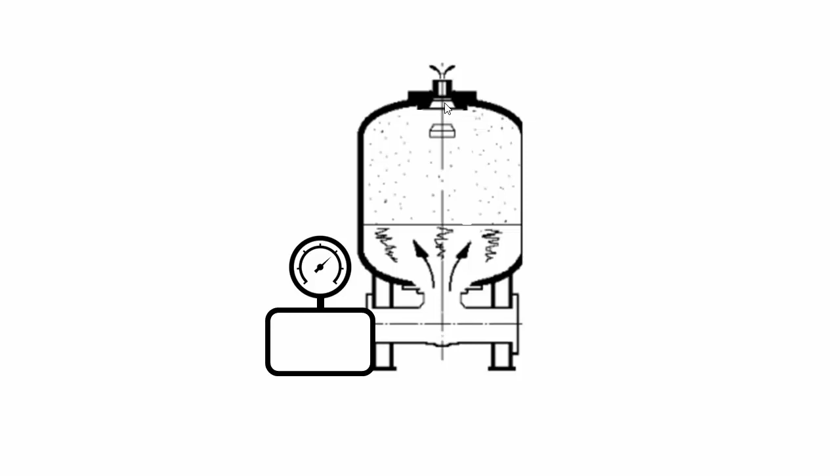There are two basic hybrid tank variations. First is a hybrid tank with an air compressor. The air compressor is used to maintain the desired air pressure under normal operating conditions while the air vent is closed. The air vent will open when pressure equals 0.

The second is a hybrid tank variation called a dipping tube. The tube is on the interior of the tank and connects to the vent at the top of the tank. As the liquid level falls below the bottom of the tube, the vent opens and air in the tank is replenished.

As the liquid level rises to the bottom of the tube, a seal is created and the air outside the tube is compressed. Liquid rises within the tube until the air vent closes. This type of surge tank does not require a compressor. The length of the tube can be varied to control the air volume.

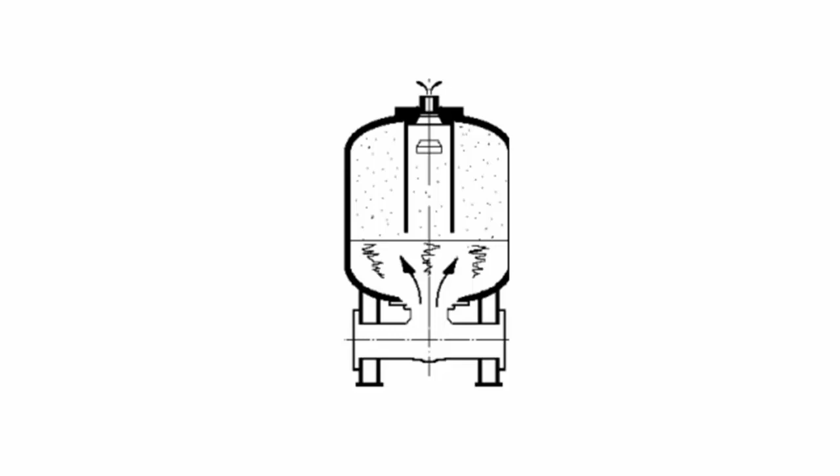When a regular hybrid tank is first brought online, the tank will initially be filled entirely with air. As the pump turns on, the pipeline is filled and the water column rises, and the air becomes compressed. A compressor is used to maintain the exact desired air pressure within the tank.

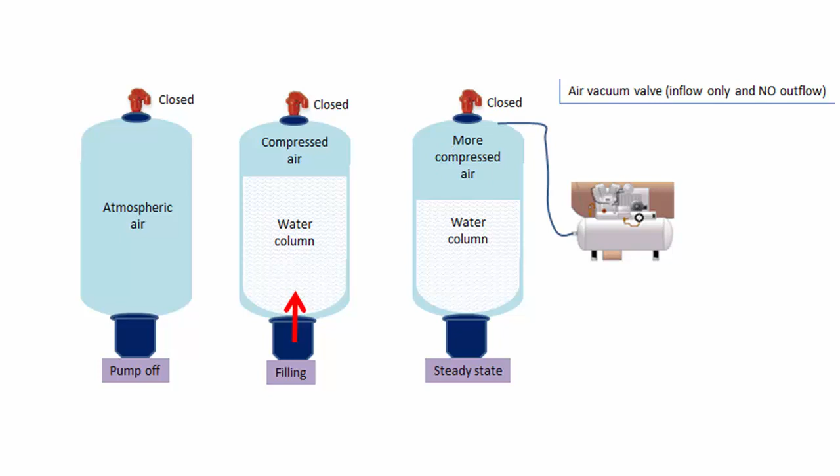When a surge event happens, such as a pump trip, the air volume expands and the liquid level drops. Once the pressure equals 0, the vent opens and air begins to enter the tank. When the pressure wave is reflected and the upsurge begins, the liquid level and the pressure rise and the vent closes. The air is compressed within the tank.

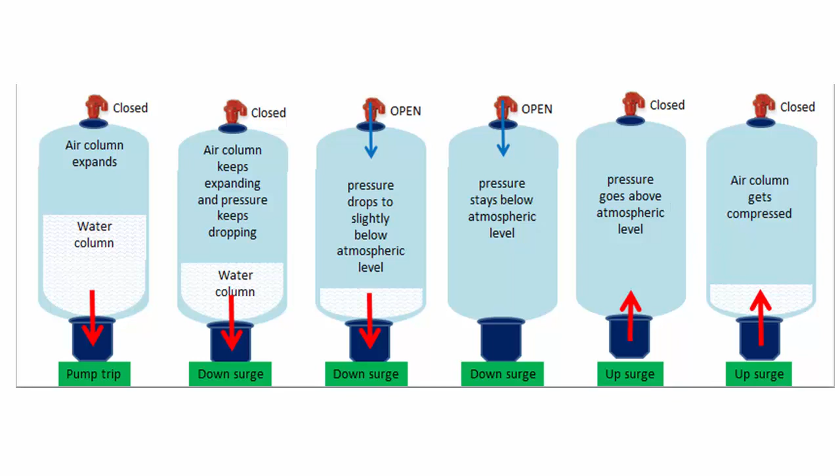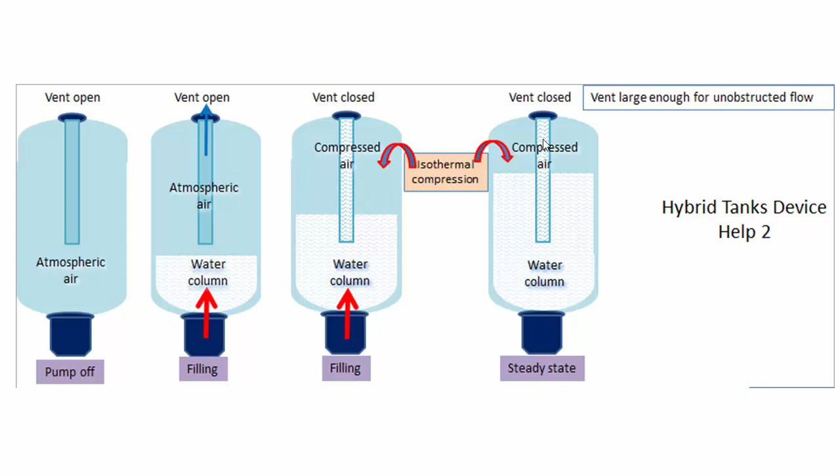When a dipping tube is first brought online and the tank is initially empty, the liquid level will rise until it reaches the bottom of the tube. At this time, the air outside the tube begins to be compressed with isothermal compression, and the liquid column rises within the tube and closes the vent.

When a surge event happens, such as a pump trip, the air volume expands and the liquid level reaches the bottom of the tube and the pressure equals 0. The vent opens and air is admitted into the tank. When the pressure wave is reflected and the upsurge begins, the liquid level rises to the bottom of the tube and the vent closes. Air is compressed within the tank. Expansion and compression are isentropic.

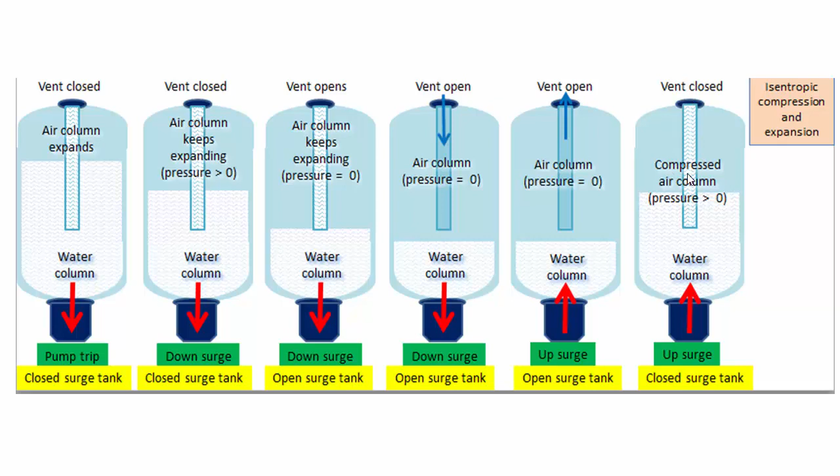To model a hybrid tank within Surge, a closed surge tank node is used. Check the hybrid box. Once the hybrid box is checked, the initial gas volume now takes on a different meaning than it has for a regular closed surge tank. The meaning also depends on whether the Calculate Initial Level option is selected.

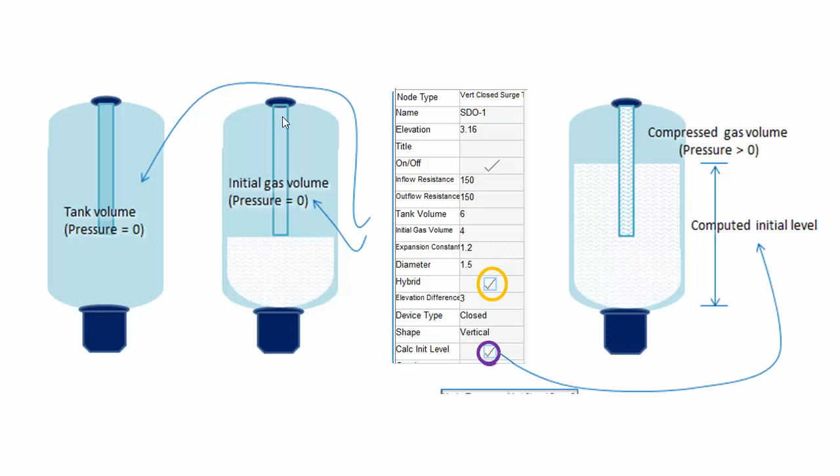If Calculate Initial Level is selected, then the initial gas volume is the volume of air when the pressure equals 0, which means just as the vent opens. For a dipping tube, this is also when the liquid level is at the bottom of the tube. This is the recommended approach.

If Calculate Initial Level is not checked, then an initial level must be input and the initial gas volume becomes the initial compressed air volume under a pressure greater than 0. The gas volume at pressure 0 will be calculated by the software. It is assumed that the air vent in the tank is large enough for unobstructed flow. For this reason, there is no input for the vent characteristics in the model.

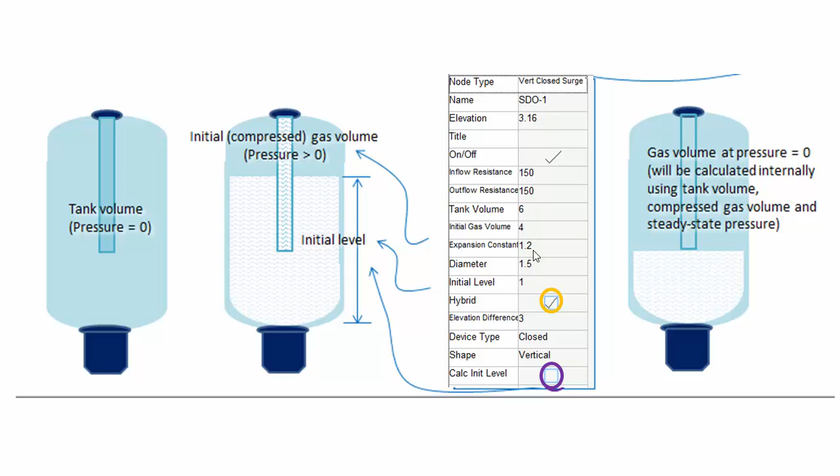One of the inputs for all types of closed surge tanks is the expansion constant. A value of 1 means expansion is isothermal, and a value of 1.4 means expansion is adiabatic. Typically, a value of 1.2 is used. However, some assumptions about expansion are made with hybrid surge tanks in particular.

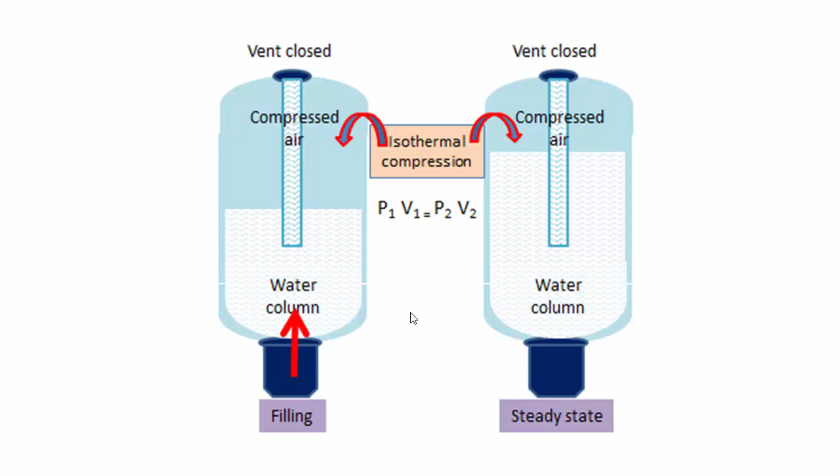It is assumed that the initial filling of the hybrid tank is an isothermal process, and that the expansion constant will equal 1 during that process. The filling of the tank is assumed to take place slowly, and it is assumed that heat is allowed to dissipate to the surroundings. The initial air volume is calculated by Boyle's law based on this assumption, where P is pressure, V is volume, and the expansion constant is N. In this case, N equals 1.

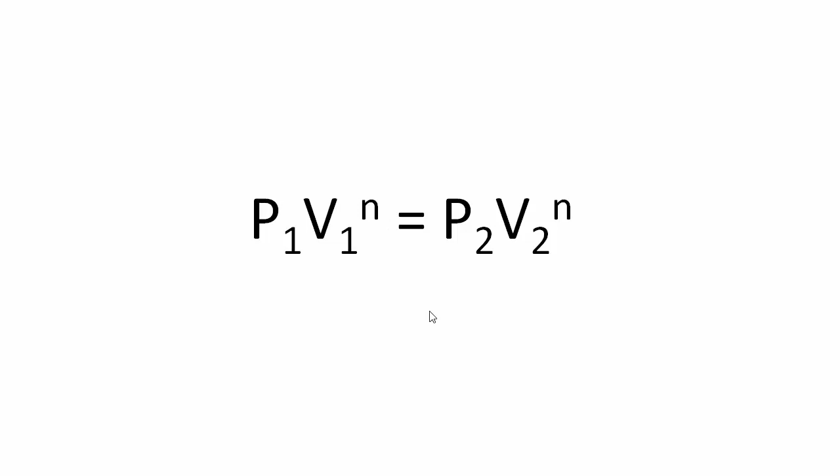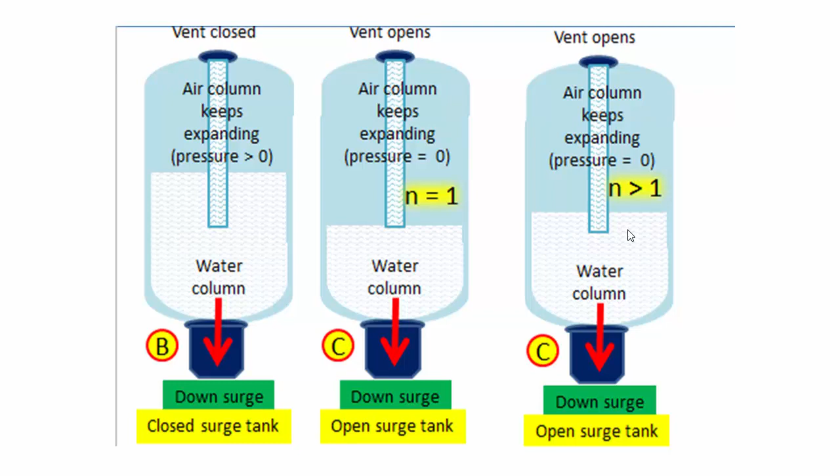If the expansion constant input by the user for the tank data equals 1, and all expansion and compression is isothermal, then this means that during a down surge, the compressed volume will expand to exactly the initial volume when the pressure equals 0. If the expansion constant input for the tank is greater than 1, which is a common input, then the expanded volume when pressure equals 0 will actually end up being slightly less than the initial air volume. Now let's look at a couple of examples.

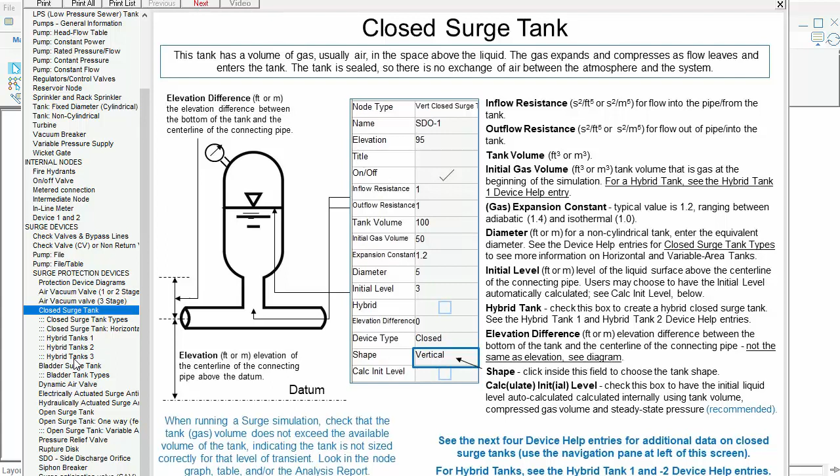Here is a model with a hybrid surge tank already set up. There is device help here with information about units, geometry, and general definitions. This device help includes many of the diagrams displayed in this video. You can click the next button to access those diagrams or click on them directly here in the contents table. For more detail on inputs such as inflow and outflow resistance and other input data not discussed in this video, please see the video called Adding and Sizing a Closed Surge Tank or use the Device Help button.

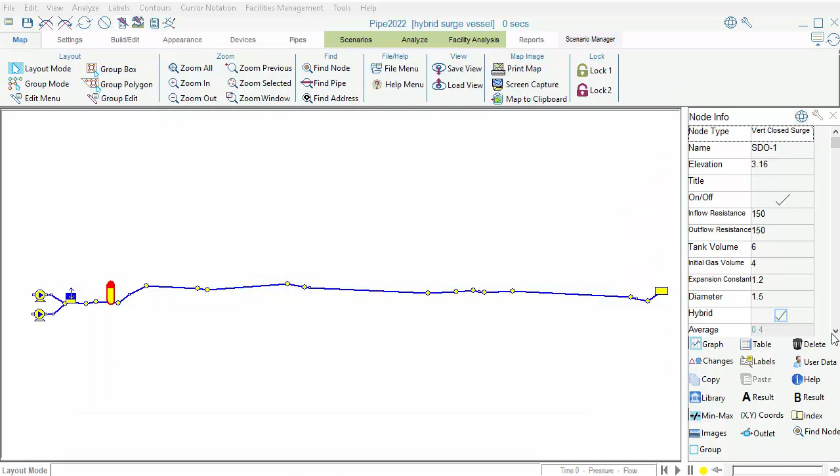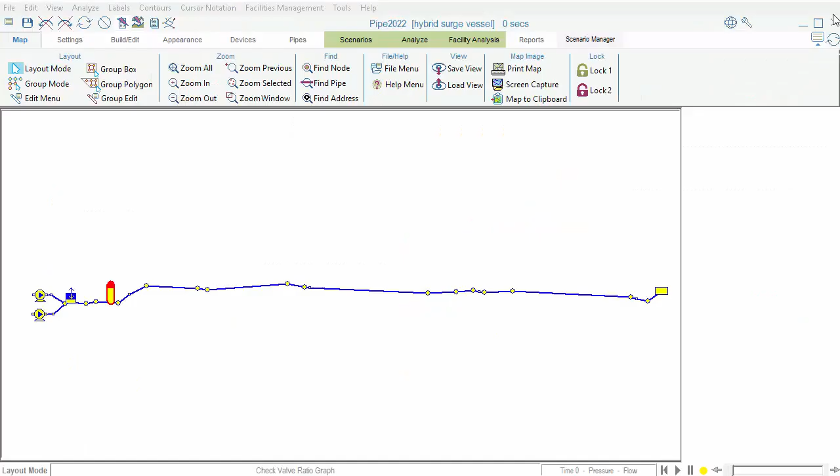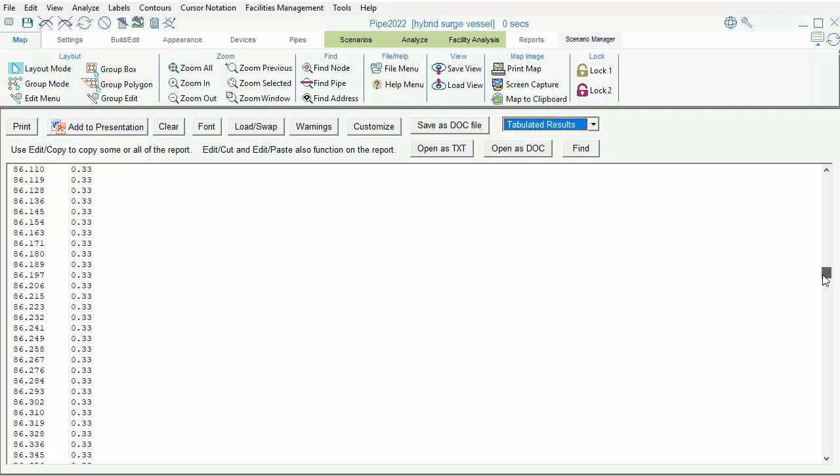So we'll scroll down to the time at which the vent is closing, about 95 seconds, and we see here that the hybrid tank is switched to a closed tank at time 95.78. Here's our second model with a slightly different response. As the air volume expands and the vent opens, at this point the hybrid tank, as we mentioned, begins to be treated like an open surge tank, and the pressure is determined by the head of the liquid level within the tank. This particular tank also has an elevation difference of 3 meters.

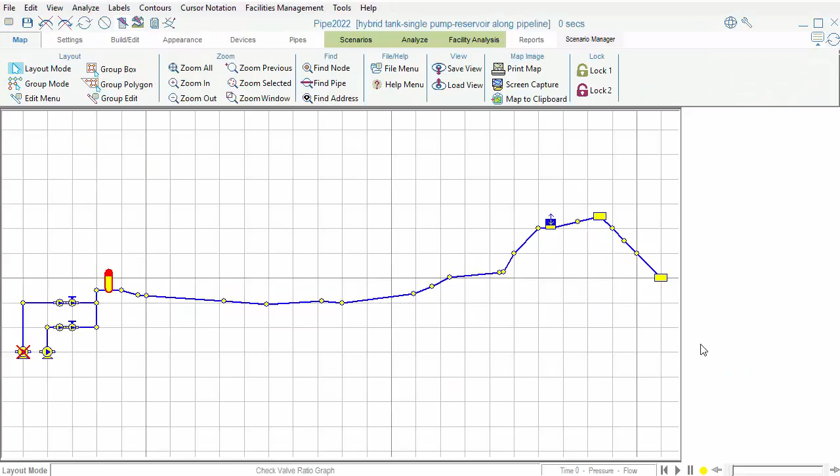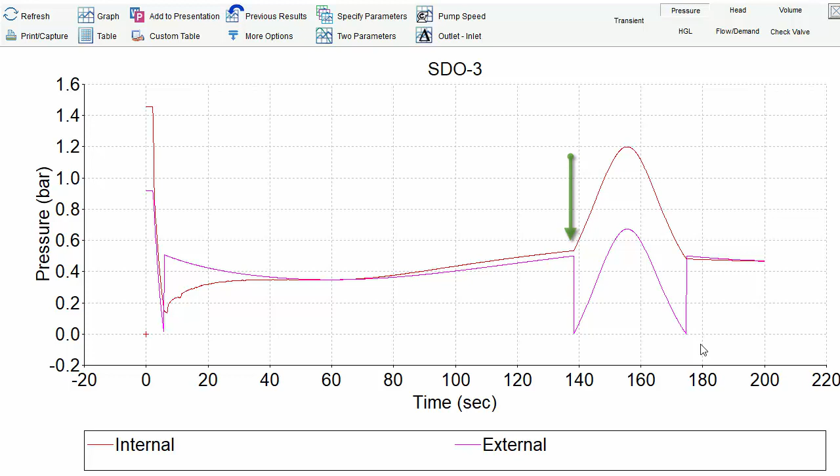So back to the graph. The external pressure when the vent opens jumps to match these open tank conditions. It takes a few seconds, but eventually the pressure within the tank and the pressure within the pipeline become equal. Then the liquid level increases eventually until the vent closes. About 18 seconds later, the pressure drops and the vent opens again.